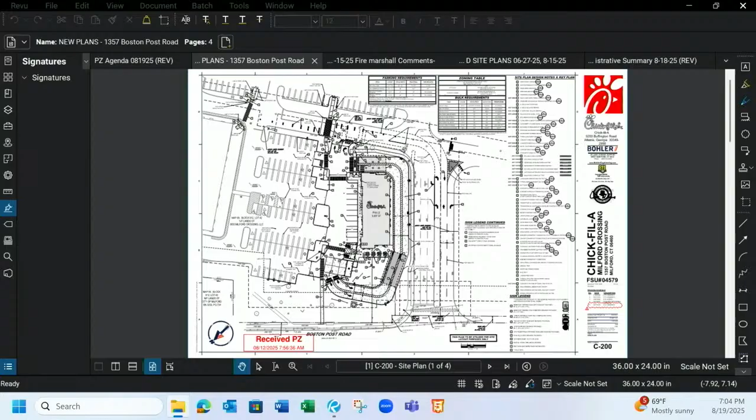So without going into anything further, I want to introduce Chaz Evans, our professional engineer, who will walk you through all the changes, not only with regard to traffic, but also the new landscape plan. And then Ethan, our traffic engineer, is going to drill down even a little bit more on how the new traffic patterns will work. So with that, I'll give you Chaz Evans.

Thank you, John. Good evening, Commission. As John said, for the record, Chaz Evans, professional civil engineer, offices at 65 LaSalle Road in West Hartford. Presenting for you tonight just the comments we heard from the last hearing. Joey Fonseca from our office had presented, and you asked a lot about the clarity and the driver conflicts that you see in the shopping center as it exists today.

Dave, if we could go to slide 4. And David, if you might bring that screen out and angle it towards the board. Thank you. Thanks. Yep. And in the packets that were given to the commission, this is the second flip there. If you flip it up, it should be up on top. This is kind of a rendered site plan just to walk through some of the changes we've made and the overall traffic flow as it exists today and some of the additional highlights.

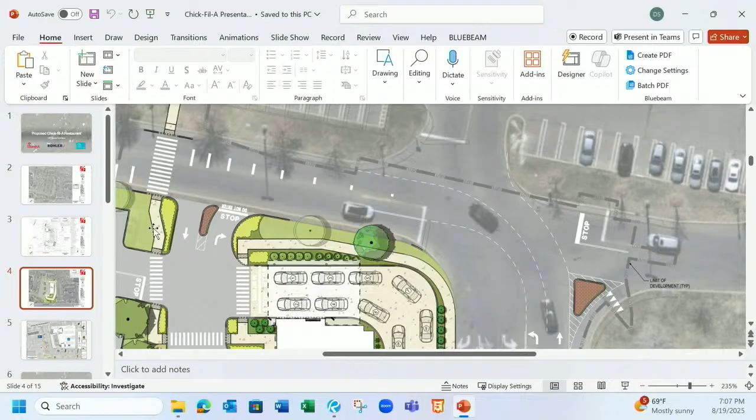Right next to the left in, right in is what's shown as the wide crosswalk. That is the raised pedestrian crosswalk with two flashing beacons on either side for pedestrians. So it acts as a speed hump for the access drive. So you're no longer going to have someone coming off Boston Post Road having that internal access drive and trying to pick up speed. They're going to be moving at a very slow rate, either as they approach Chick-fil-A or as they continue to go through the access drive.

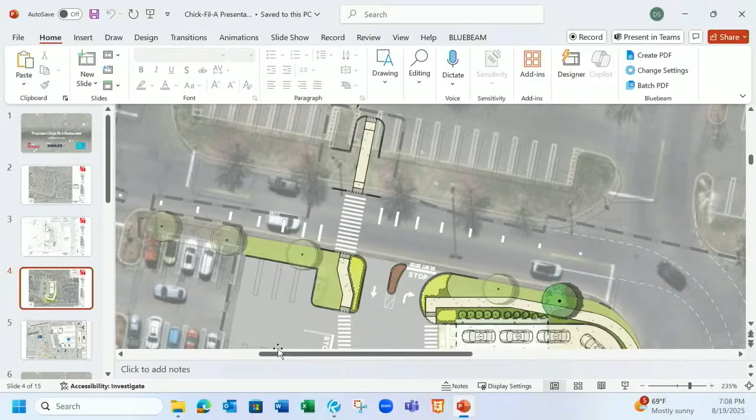So someone looking to turn left isn't having someone that's moving relatively fast. They're coming up on a speed hump. They can make that decision together. The other piece I'd like to point your attention to, to the right of the site in the main three-way intersection, is we've looked to further define all three travel movements that can be made once you come into the center.

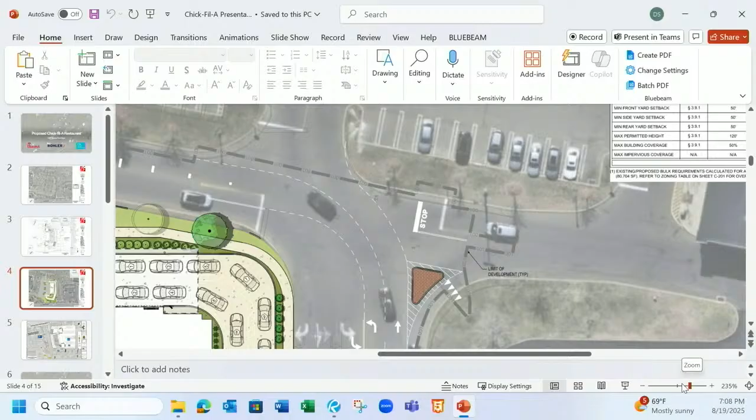Currently, as most of you may know, it's 2 lanes. The striping's dissipated, and for the most part, folks in the right lane turn to the right. Folks in the left lane either go straight or left, but most folks at the stop sign, aside from a turn signal, really aren't sure which movement that person who's coming in off Boston Post may be making.

We've added what you'll see in red there, a mountable curb island. So in the event that someone is in the right turn lane, they're not going to make the movement where it's wide open asphalt and they can just make a left turn and disrupt the flow of traffic. If you're coming off Boston Post Road and you happen to be in that right turn lane, you stay in the right turn lane, you'll have to make the right turn or else you'll come in conflict with the mountable curb.

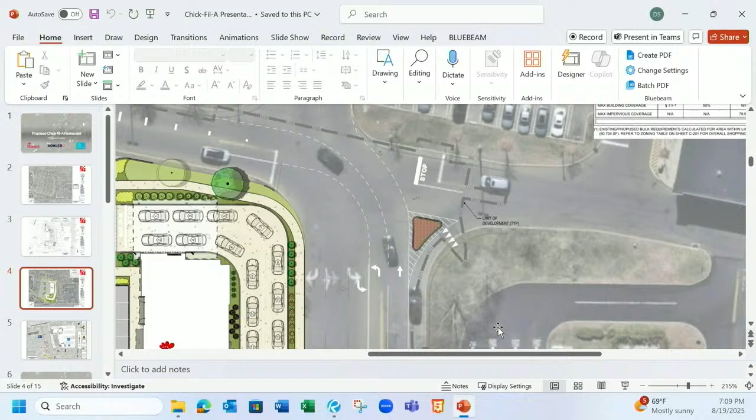Also, we're looking to adjust the double yellow striping to create a dedicated straight lane as well as a dedicated left lane to signalize who would be going straight towards Walmart and then who would be coming left towards the Barnes & Noble and Chick-fil-A development. In addition, as you'd see in a major intersection, we have the dash striping throughout this intersection to really keep people in their lane as they're moving through the intersection.

Again, it's to provide additional clarity to not only the folks entering the site on which lane and which direction to travel, but also anyone at any of the 3 points. If a turn signal is not on, they know someone in that far left lane would be making the full movement through.

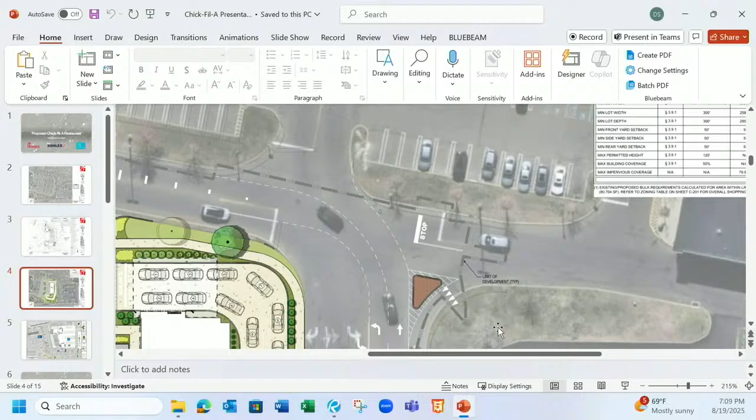In addition to that, there's additional signage we're looking for the plaza to, again, suggest the routes that folks would take to go to Walmart, to go to Barnes & Noble, to go to Golf Galaxy, right when you come off Boston Post Road, just so you can make those decisions as you see all 3 lanes appear.

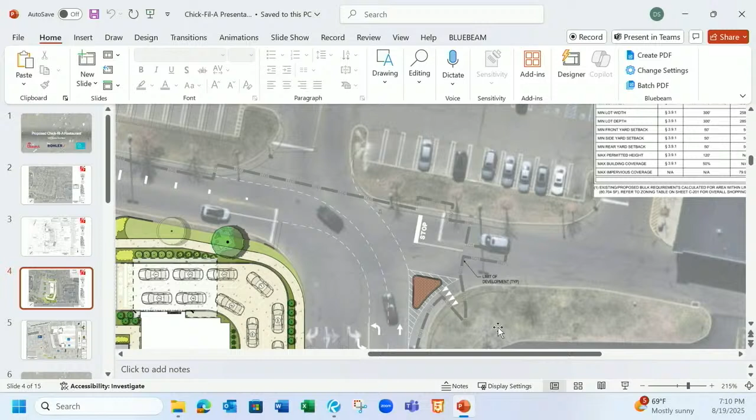The other piece, David, if you could zoom out slightly, that was a comment from staff that's been addressed, and I think addressed in more than just meeting compliance. There was a comment we needed 1 additional shade tree. We had looked at the plantings up against Boston Post Road, and there were a total of 4 additional trees, 1 shade tree and 3 ornamental trees, to give that corner a little bit of additional landscaping.

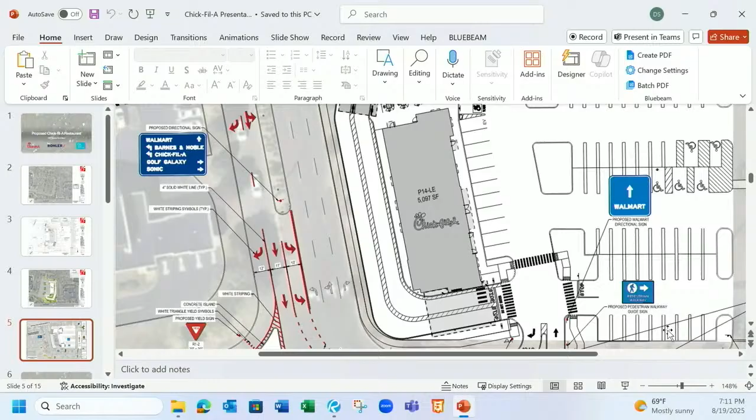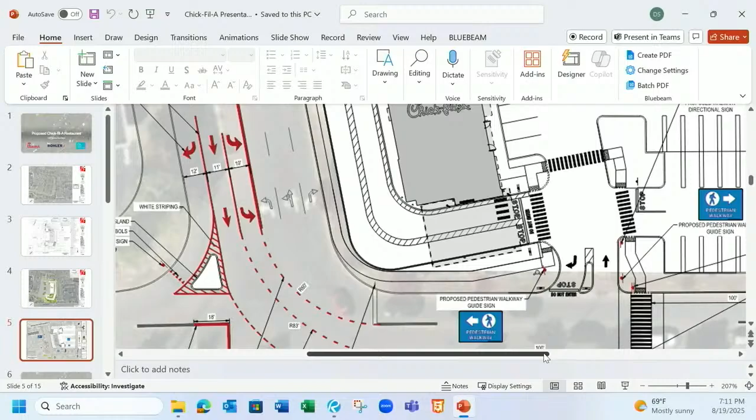And then one additional sign we look to make is as you're exiting the drive-through, there's really two decisions. You're either going to go right or you want to go left. Now that we've removed the left turn movement out, most cars that would make that left would then continue to go straight through this intersection up close to the Barnes & Noble and then take that first right at a four-way stop intersection.

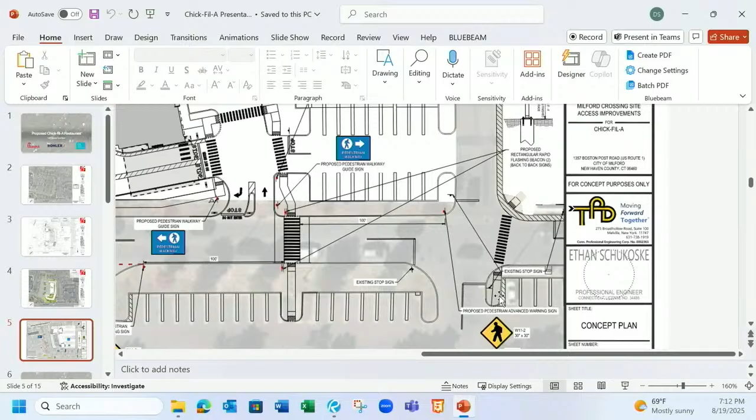So there's no longer the conflict they have up at the central access aisle where there's free-flowing traffic off Boston Post. It's now a four-way stop intersection where folks are using the rest of the plaza. We'd also look to, as a comment that was made last hearing, what's stopping someone from taking a right, taking another right, and then trying to make a left to go to Walmart.

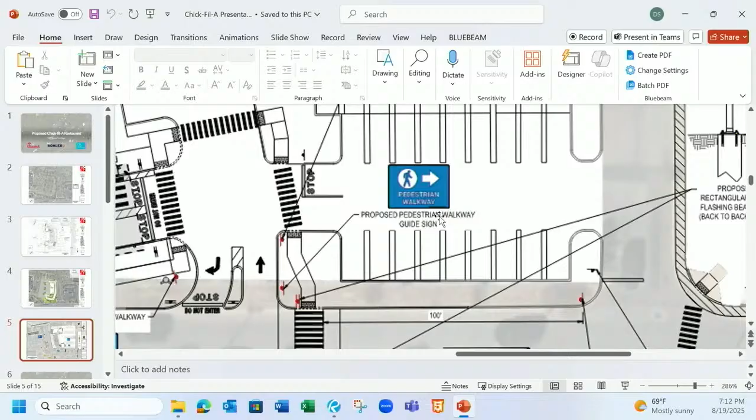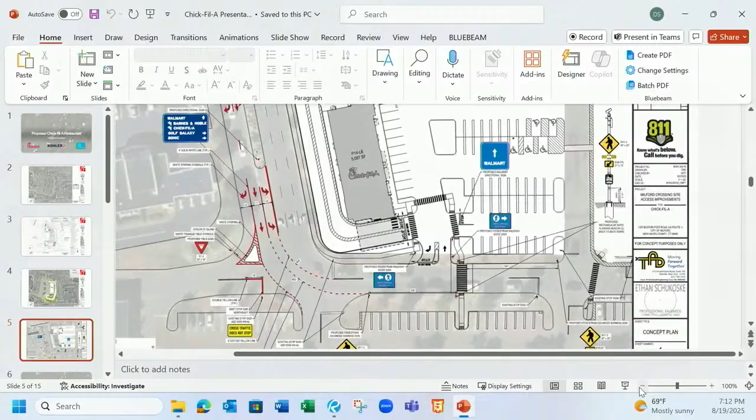We're looking to add the signage that if you're at the drive-through, you exit the drive-through, you want to go to Walmart, the suggested movement is to continue straight, go up to the four-way stop intersection, and then you're lined up directly with Walmart to kind of make a cleaner access and pull traffic away from the main intersection closest to Boston Post Road. With that, I'll pass it off to Ethan to walk you through more of the traffic improvements and how we feel this is providing additional clarity to the center for the proposed development.

Good evening, Ethan Schukoske, for the record, TAD Engineering, offices at 275 Broad Hollow Road, Melville, New York. I presented at the prior hearing, so also a professional engineer in the state of Connecticut. I think Chaz covered the improvements pretty well. He went over most of the changes from the prior site plan. I believe you have in your packets there what's up on the screen. So I just want to touch on a couple of points.

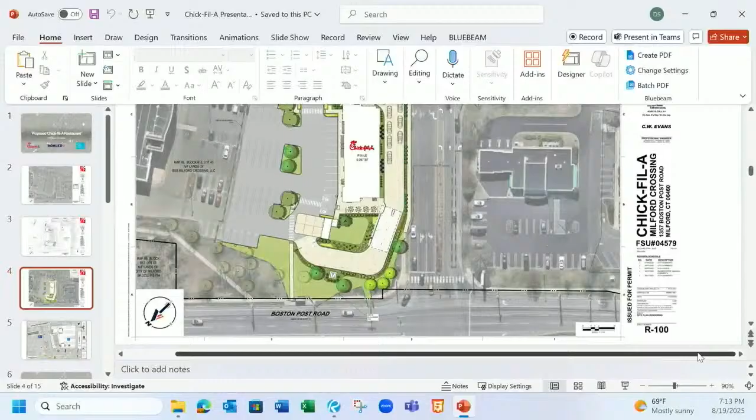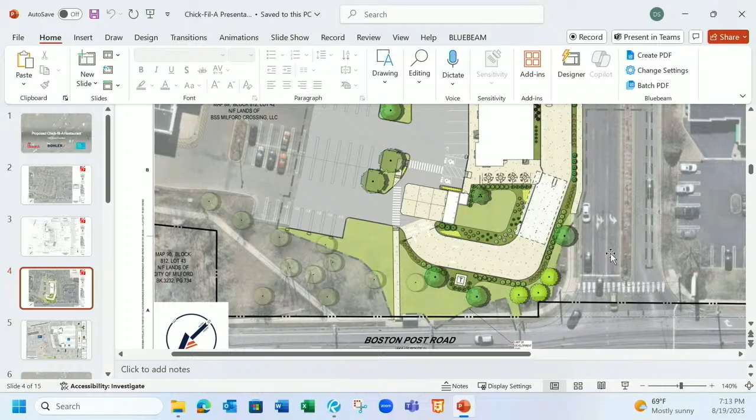One thing I don't think Chaz mentioned was additional sidewalk. I think it was a suggestion by one of the board members here to add that sidewalk from the bus stop that's along Boston Post Road directly to the site. That's in addition to the sidewalk that's being proposed along the drive aisle to the main entrance. So I think those added pedestrian connections definitely help connectivity of the site overall, and especially to the Chick-fil-A, having that direct connection from the bus and the transit options.

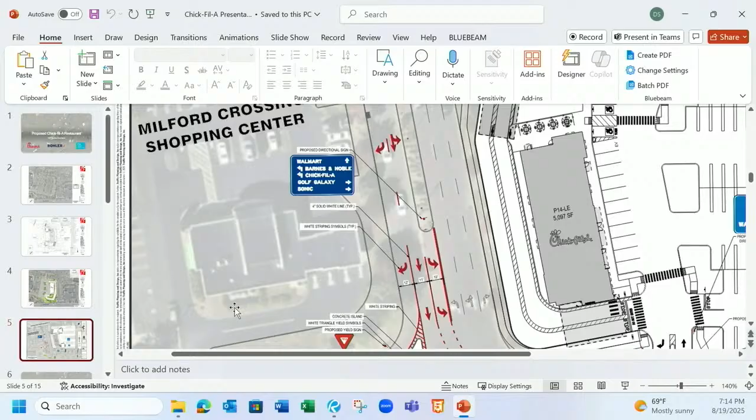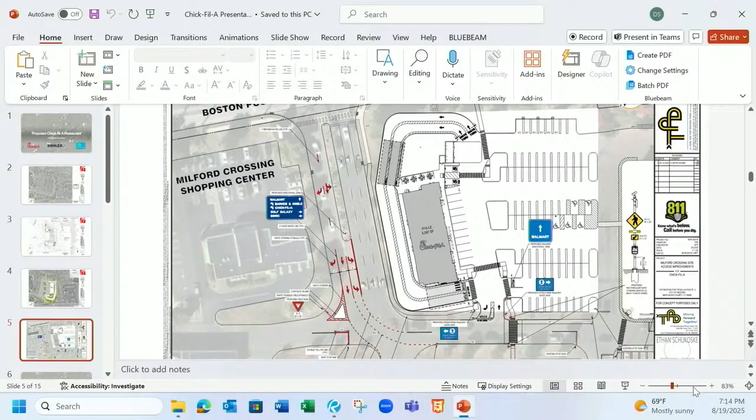If you go to the next exhibit, the signage plan we prepared, Chaz sort of went over this, but that blue sign as you enter into the shopping center, the intention is just to give drivers a little bit more direction. As you're coming, to go left or have the option to go straight to Walmart or right to the Sonic or to the Golf Galaxy. Again, the real intention is to give better direction to drivers as they enter the center than they have today, and especially with the Chick-fil-A.

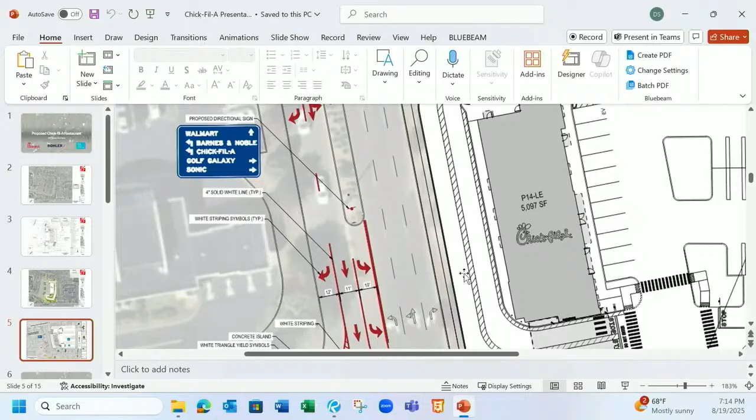As you enter into the center, as we go further in, as it was mentioned, we have that raised island protecting your right turn movements, and in addition to the stop sign, so currently it's a three-way stop, as the plan is laid out here, on the east, west, and northbound approaches to the intersection, and there's no stop as you enter into the center. And that was intentional, so as not to have queuing back onto the Boston Post Road.

We are proposing addition of some signs under the stop signs: Cross traffic does not stop. These are standard MUTCD signs, which just let everyone know, hey, you do have entering traffic from Boston Post Road. Be wary of that as you wait for your turn to go. And then as you turn towards the Chick-fil-A, as you make the left turn into the site, we have some additional pedestrian signage. This was on the prior site plan that was presented at the last hearing, but just to highlight it again,

as you approach the raised crosswalk, you have some pedestrian warning signs, and then at the raised crossing itself, just on the other side of the proposed entrance, you have flashing beacons and pedestrian warning signs. So the idea is to provide that direct connection again from that bus stop all the way down into the center, which is really an improvement to the connections that they currently have, which is, I believe, none.

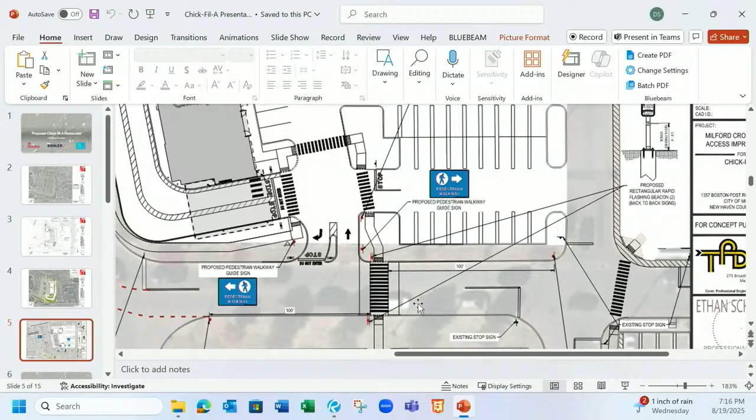So I think Chaz mentioned it, but again, just as you're exiting the drive-through, there's some signage just to let drivers know if they want to go to Walmart, they should be going straight through that first intersection and then making a right out in front of the Barnes & Noble. Happy to answer any questions. I think that pretty much summarizes the changes from the prior application.

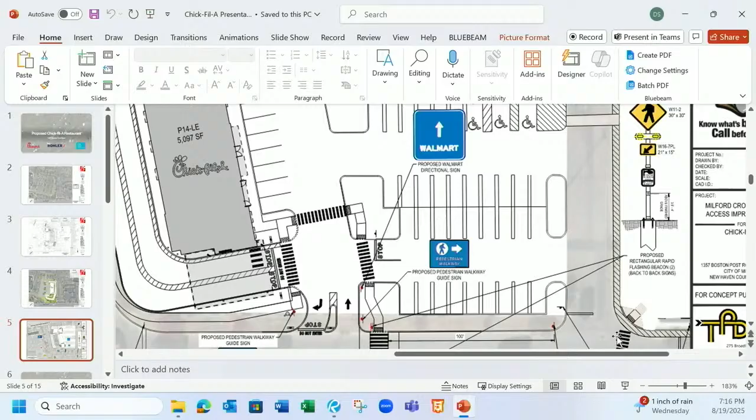Yes, so just to be clear, if you want to go to Walmart, you're turning that section of parking into primarily like a road. So people will be entering and exiting, parking their cars to go to Walmart and walking to Walmart, but it's actually going to be more like a thoroughfare for those who want to go to Walmart. Yeah, it would be a drive aisle like any other in the shopping center. It's just letting drivers know that might be the more preferred route to go straight.

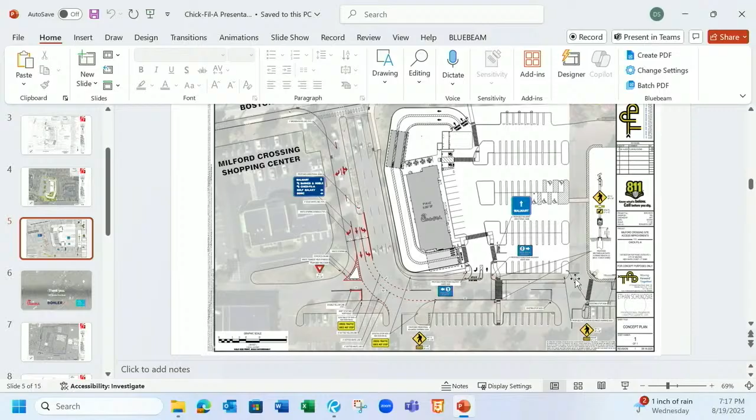Yeah, I'm concerned about the safety of that. It's not normal to have, nowhere else in this complex would have a preferred way to get from one place to another through existing parking. But anyway, that's just a thought and a comment.

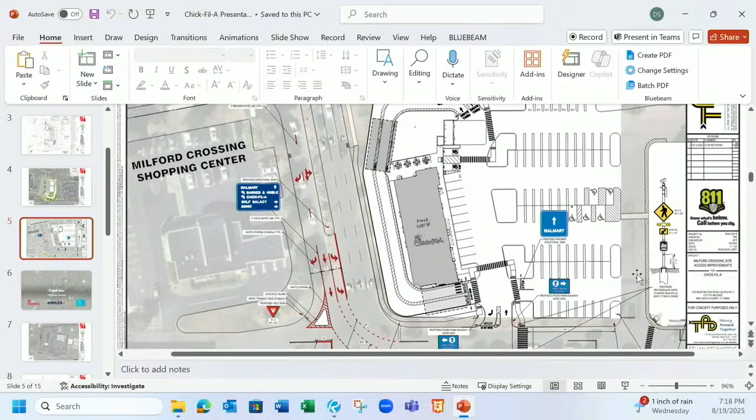Are there any other? Anyone have a question or comment? Are we asking questions, Mr. Chair? Yeah, I think you should, yes. Okay, thank you. Good afternoon, or good evening. Good evening.

Let's say I want to talk about use now. So a vehicle enters the plaza traveling north on the Boston Post Road, and they make a right to enter the plaza, right? Yes. When that individual motorist enters the plaza, there are 2 lanes in the direction they're traveling, correct? Correct. Right. And then at some point, it splits off into 3 lanes. Correct. As you get closer to the intersection, currently there's a median that runs 3/4 of the way down, and then it opens up a little bit.

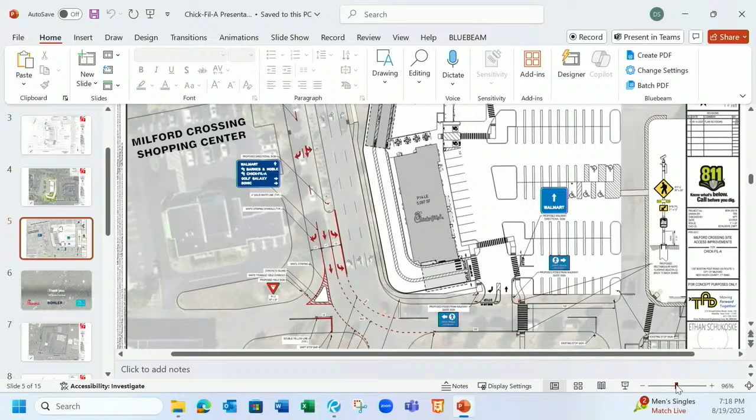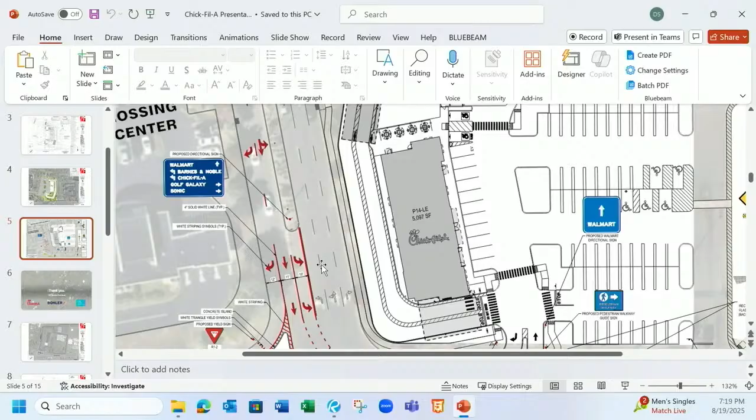That median, it looks like a strip, maybe a couple feet wide by several feet long. You're referencing the existing median as you enter? Right there, yeah. Yeah, it's probably about 12 feet wide, a landscaped median. Okay, so it's going to be a landscape median, not just flat ground. No, yeah, so that's existing, and it's an existing curbed and landscaped median. And it's going to stay that way? Correct. Okay. Yeah, we're using the existing pavement here. As currently today, once you get past that landscape median, it really opens up this wide pavement area, which doesn't have a lot of direction. Right, now it's more of a free-for-all, the way it is.

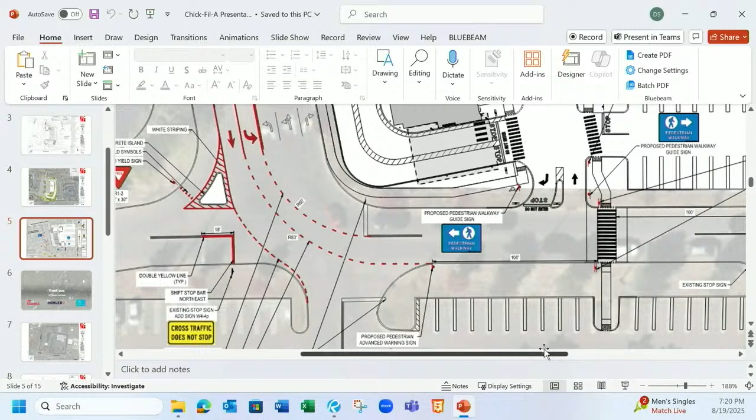Correct. Okay. So it opens up to 3 lanes, and then there's a right turn lane to go to TD Bank, right? Correct. Then there's a straight arrow that leads you to the parking lot of the Walmart. Yes, they will go straight down to Walmart. My question is, it's a straight arrow. Could individuals still turn left using that middle of the 3 lanes? So if you look at the dash striping that we're proposing, sort of directional striping, once you're in that lane, it's intended to direct you straight south as you go down. So if you're in that through lane, and we added this since the last hearing, we added additional striping on your right side to sort of direct you down into that lane.

So, as I understand it, then that straight arrow with the striping, the red striping, is leading motorists to go towards the Chick-fil-A and the Barnes & Noble. See, the red striping, it's leading people towards the right. Correct. It's leading people towards that parking lot. That's for the left lane, and then you have additional striping on your right side that ties into the drive aisle to the south. Say that again. We added some additional directional striping, the dotted striping on your right side, to direct vehicles down to that drive aisle.

Perhaps another arrow in that area would be a good idea to reinforce the point, okay? Yeah, we can certainly look into that, yeah. We're happy to add that. Because you're assuming people drive like engineers. And as a planning and zoning board member, I don't make such an assumption. Understood. We can certainly add an additional arrow. So perhaps an additional arrow would be a good idea. You agree? Yeah. Thank you.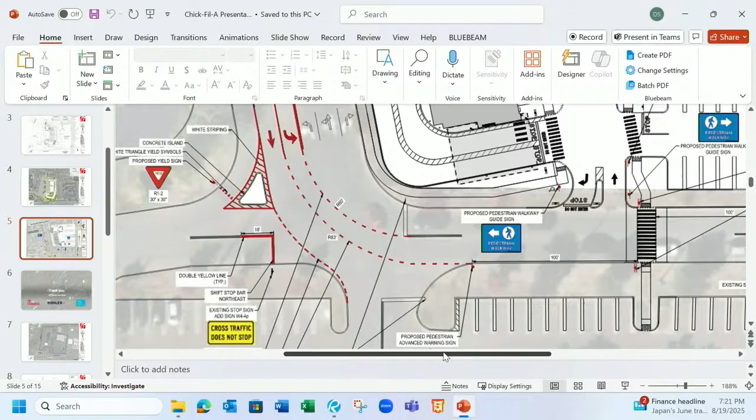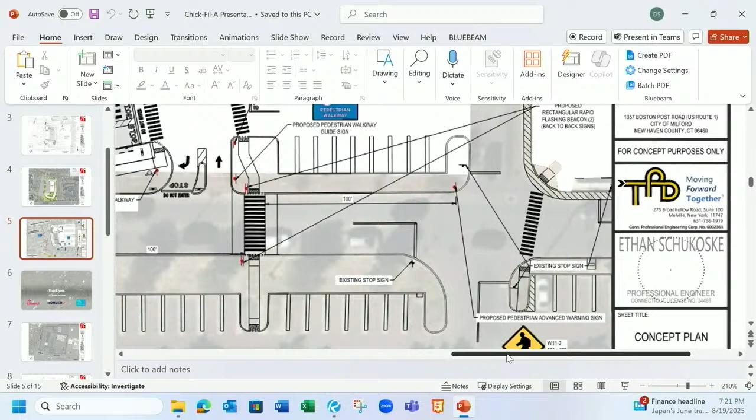All right, can we go now towards the other area of the parking lot? Towards where Lumber Liquidators used to be? Mr. Sulkis? Yeah, okay. You see the crosswalk? Mr. Sulkis, can you move the cursor to the left, more left? See that raised crosswalk? The crosswalk, yeah. That's a raised crosswalk. Correct. Who are the intended users of that raised crosswalk? Any patrons walking from Boston Post Road, or employees of the Chick-fil-A that are parked on the south side could also cross there. Okay, so you intend for employees of Chick-fil-A to park in the parking lot of Walmart?

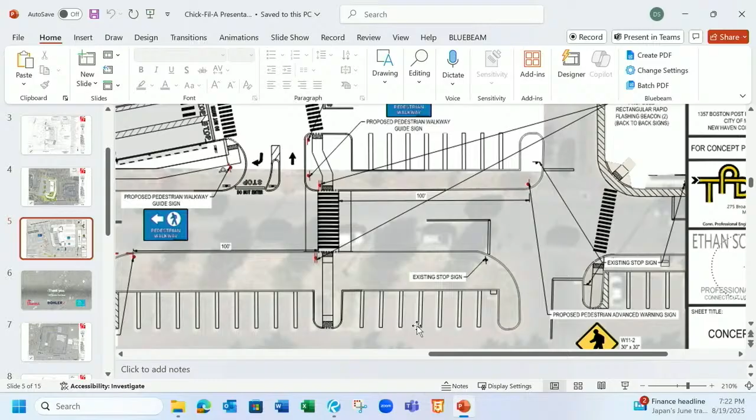They would park on the northern side there. That was a yes or no question? Yes. So just to be clear, I know we touched upon this last time. There are no defined areas. There is no subdivision on this parcel. So anyone can park anywhere and go to any store. It's not as if Walmart can say, that's my parking space, patrons to Barnes & Noble can't use that.

So I know we all tend to refer to it as the Walmart area, the Barnes & Noble area. There is no distinguishing characteristic between all the uses and what they control or cannot control. And this is typical of any large shopping center, power centers, where there is a benefit to be derived by all the retailers, hoping that patrons will visit more than one store at a time. So yes, we can call that the Walmart parcel, but it's not really a defined subdivided parcel that they control.

Just to clarify that, so if somebody wanted to put in a pad site in what we're calling the Walmart parking, that's permitted as well? Well, no. In the same way that Barnes & Noble, we submitted the letter that said they had no objection to this, so there would be the same sort of control over Walmart, but it's not something that they own or they can exclude people in terms of the utilization of parking. So yes, if you want to put in a new bank in the middle of that parking area in front of Walmart, then Walmart would have to give their consent in the same way that Barnes & Noble gave their consent.

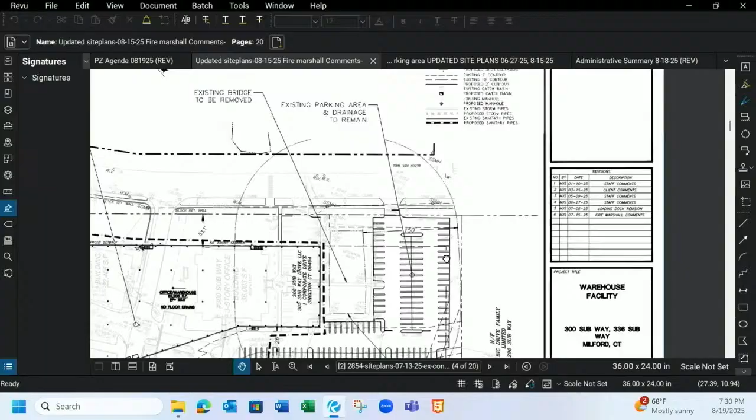There's no change across the street at the 305 address. The only reason that is tied here is because we're changing 300-336 Sub Way, the use and the buildings. So we needed to bring an application to amend that special permit as well, just to make sure that the parking's still aligned. There's a color highlighted parking plan in the application materials that lays out which parking spaces are for which on this particular site.

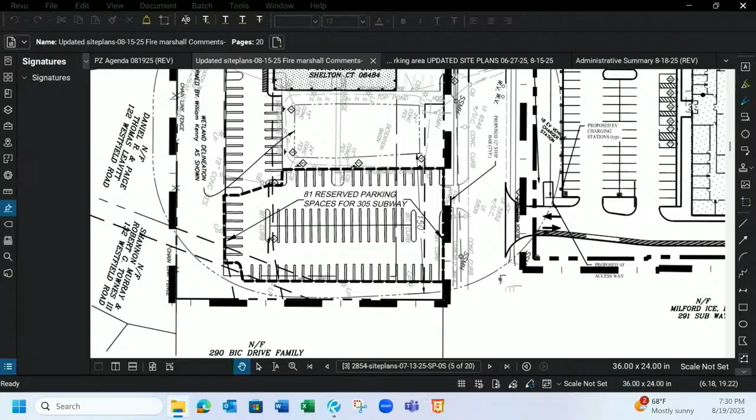Mr. Cinto is here this evening. As I mentioned earlier, he'll talk about the proposed tenant. We've been to inland wetlands and received inland wetlands approval. We've received a favorable review with some conditions from the city engineer, a favorable review from the fire marshal with some conditions of approval, the police commission report with an approval, and sewer commission approval. We started this project late 2024. We've made some revisions over the time frame, based on Mr. Sulkis's comments and Greg Podleski's comments and in the wetlands.

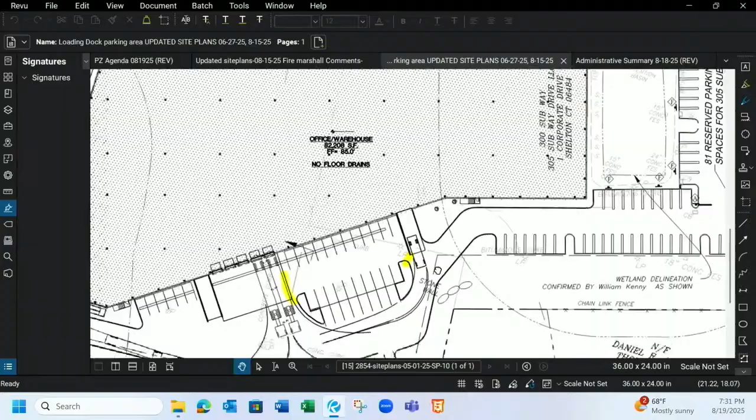One of the revisions we've done recently is we changed the access drive in the back of the proposed building so that the existing trees, some of which are pretty mature and tall, and that existing vegetation would not have to be removed. One of the original proposals was going to require clearing that vegetation and those trees. There's a residential district with single-family houses behind the property, so we thought that would be a great idea. That was actually Manny Silva and Pat Rose's and probably Mr. Cinto's suggestion. So we have all the necessary approvals.

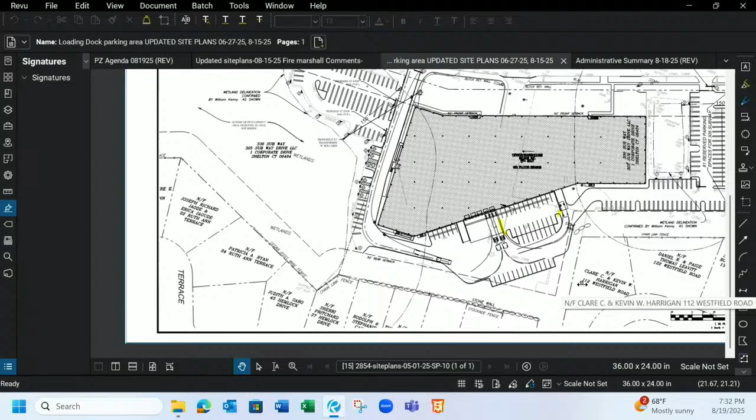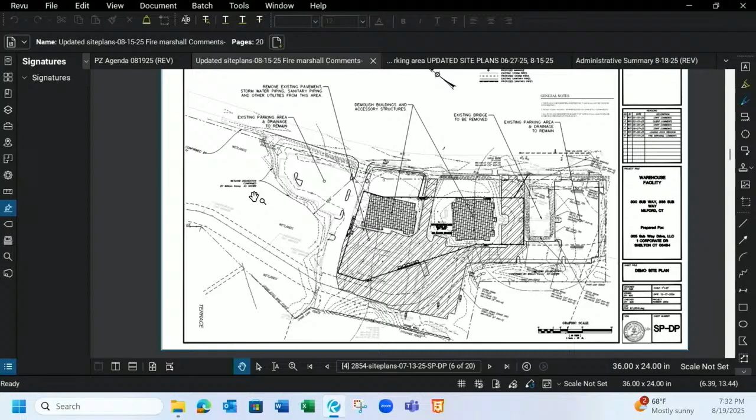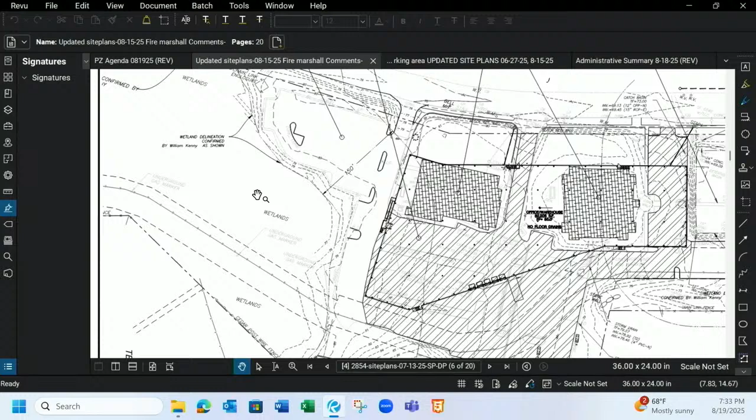A large part of the parcel will remain inland wetlands. We're not changing the site with respect to that area. That area goes back to what's now the Regional Water Company land, I think to the early 80s or even prior. There's a conservation restriction on that parcel. Typically you hear from the city engineer that he would like concrete curbs and sidewalks around the edges of that parcel. In my conversations with him and with Mary Rose, the inland wetlands officer, based on the conservation easement, that section would remain untouched so we wouldn't be in violation of that conservation easement.

I did see Mr. Sulkis's administrative summary form. An earlier version said the project was zoning compliant, and then a revision asks, based on the recent site plan revisions changing the drive aisle and driveway so the vegetation and trees aren't removed, that the plans be changed across the board so that all the plans match. Pending your questions, I'll be followed by Mr. Silva or Pat Rose, the architect.

Are there any questions or comments from the board at this point? Tom? Yes, Attorney Castine, good evening. Good evening. Just so I understand, am I correct in saying that this proposed plan will have no adverse impact on Mondo Pond? That is correct. Thank you. You're welcome.

Yep, go ahead, continue. Thank you.

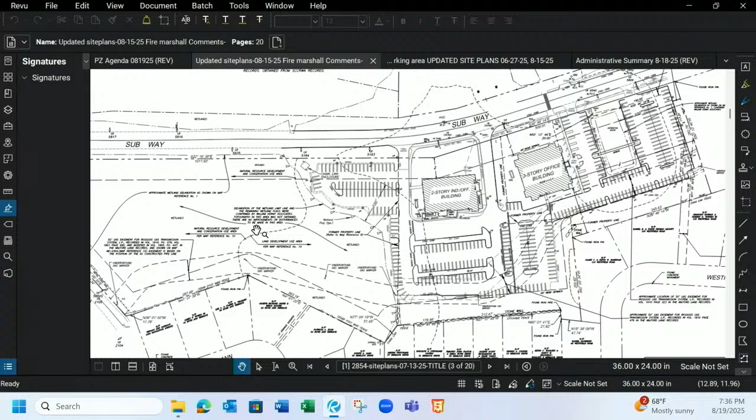And we've had the wetlands review and had the approval; we're not going near our wetlands that exist, and that's not being touched at all, so that's not an issue at all. So if we could go to SP1A, David's probably better. I will show you the revised SP1A. Oh, he's got the correct one, very good.

So this SP1A shows the parking lot on the right-hand side of the screen, which is for the parcel across the street. Then there are parking spaces that go behind the building, then two by the warehouse area where there are loading docks. You've got 5 loading docks and 2 drive-in doors. And then parking spaces beyond the loading area for those trucks that will be coming into the loading docks. And then beyond that is, for the most part, the existing parking that's remaining.

We're adding a few spaces along the drive aisle behind the building, but for the most part, it's existing remaining parking spaces. The building configuration is made up of the constraints of the site. We have a setback from the street of 50 feet. We are within 10, 15 feet of the retention basin on the south side of the street.

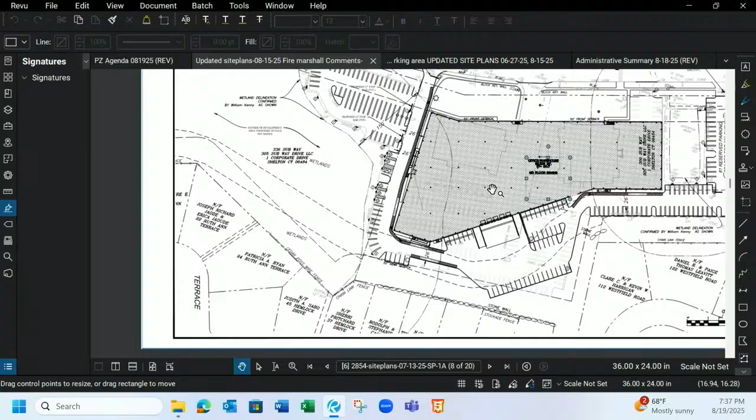And then we have the gas line, which is on the west side, which we have an easement which constrains us. We can't go into that easement. And then the driveway on the north side of the property. So that's what creates the shape of the building, essentially. The building being 82,208 square feet in size.

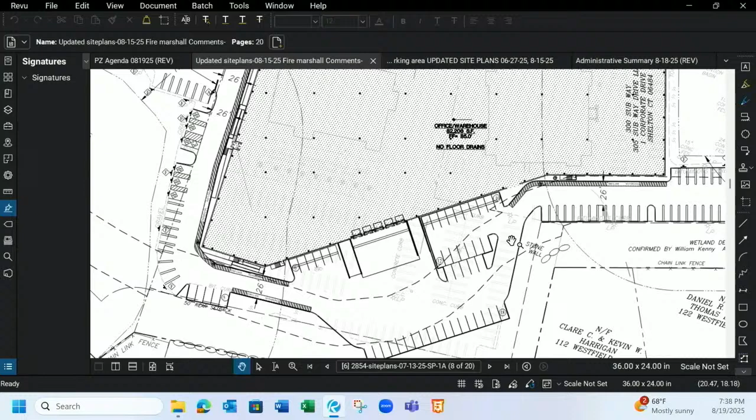Based on the fire marshal's review and some other thoughts about maintaining vegetation on the property line in the rear, we've reconfigured the site plan so that we have consolidated the 5 loading docks together with drive-in doors on either side, and have a parking lot off the right-hand side, which is accessed from the drive aisle. So that allowed us to move our development about 20 feet away from the existing property line on the side there. Dave, if we could just go to A101 if you can.

The building, which is 82,000 square feet, all but 12,000 square feet will be by one tenant. They have about 22,000 square feet of office space in the front on the north and east sides of the building, where you see that office area, and then the warehouse is to the south of that office space. And then there's an available 12,000 square feet below that.

So what we've done is we've split the docks and the drive-in doors so that the 12,000 square foot tenant has a loading dock and a drive-in door, and the larger tenant has the 4 docks and the drive-in door. If we could go to the next slide. These are the elevations of the building.

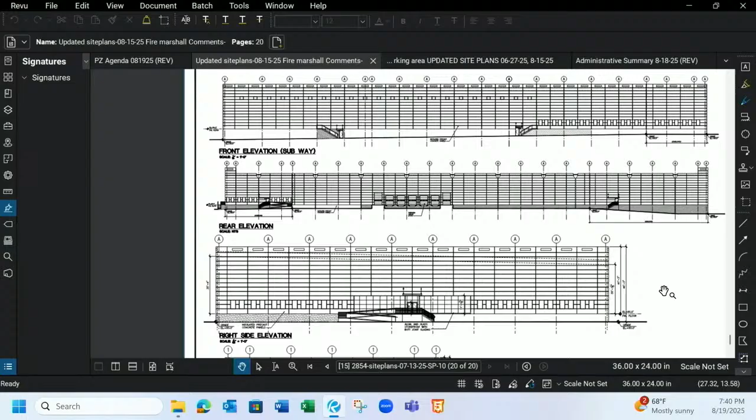What we'll be using is a precast concrete panel, similar to a panel that we've used previously on other buildings. It is white, completely white, and has openings at the top of the panel, so you actually see through it at the top. On the north side, which you see here, this is the entrance into the main tenant, where we have a handicap ramp and stairs. We have a large storefront area, and then windows on either side for the office space.

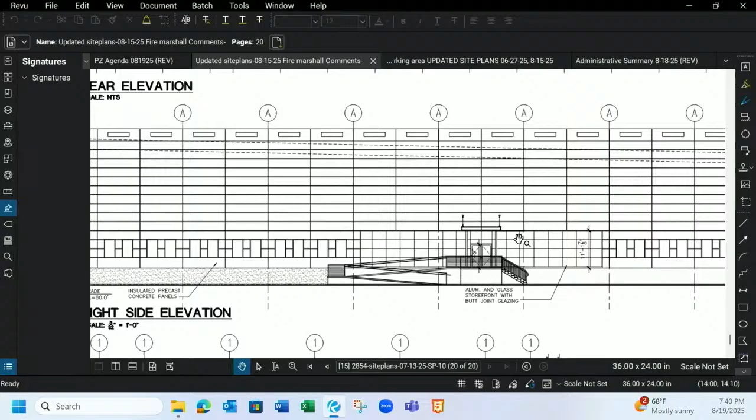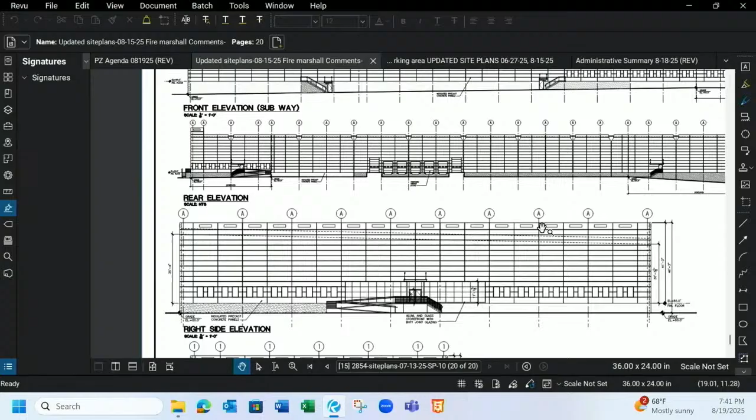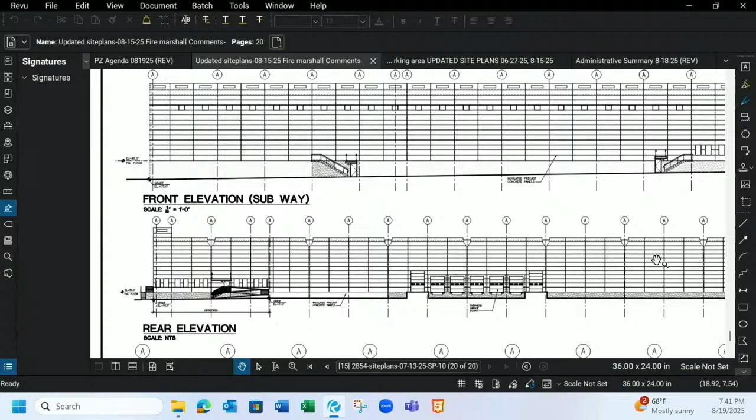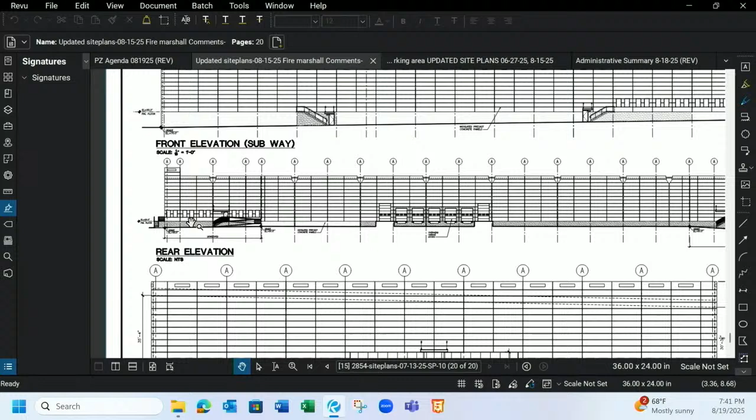Any questions? I'd like to have Manny Silva come up and just talk about the engineering. That's fine.

I guess it doesn't disconnect. I usually like to be mobile.

That's fine. Good evening, Manny Silva from Rose Tiso and Company, registered civil engineer in the state of Connecticut. Address is 35 Brentwood Avenue, Fairfield. I'd like to start with SP2.

So as Pat stated, the site in general is generally impervious area, has 2 office buildings with some paved areas here. As you can notice, the existing pavement is kind of ghosted away, but what we tried to do was keep the new footprint of the impervious area, the parking and the building, within the existing footprint. We had some adjustments. For instance, here, there were some paved areas that we were eliminating, creating a larger buffer for the neighboring properties.

Also here, where Pat was talking about, you can see in comparison on the landscaping plan from our original proposal, we have pulled that further away to keep that within the existing edge of pavement that's out there today. The drainage design is basically broken up into 3 different areas. There's this northern parking area which is remaining unchanged near the wetlands, and that has kind of a sheet flow that goes to edge gravel trenches, which then infiltrates the water underneath the actual pavement.

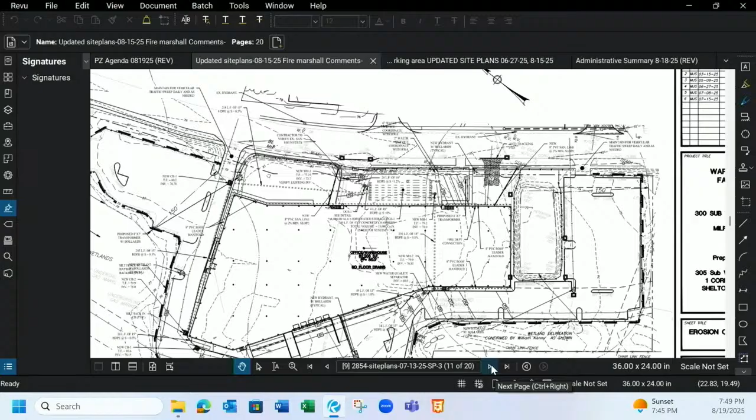And then here is Bill Kenny's landscaping plan. As you can see here, we have some landscaping where there were some paved areas in that lower corner near the loading docks. And this is where you see the difference that Mr. Sulkus was pointing out, is that the landscaping plan hasn't been updated to the other plans. We actually pulled this right here further away from the neighboring properties, and it's essentially here now, kind of where the existing pavement edge is today.

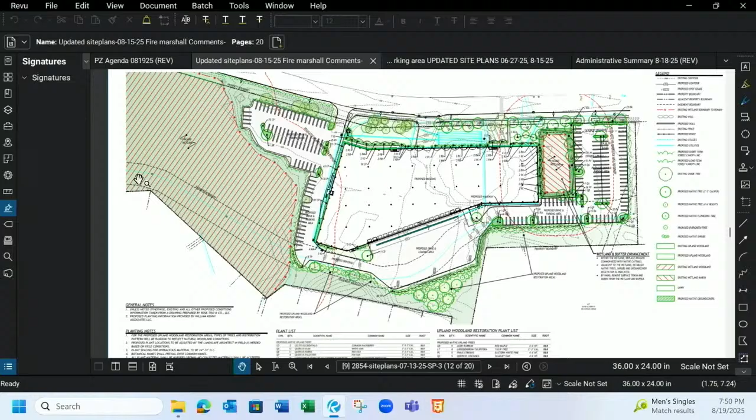So this area here will preserve the existing trees, and there'll be an existing native buffer here, and then we're going to supplement that by removing this pavement here and adding trees along this triangle here and along this border here with our neighbors.

SP5 is our lighting plan, and a lighting plan is to ensure that we don't have any light spillage off of our property. So as you can see, this is our point-to-point. Our fixtures are full cutoff, night sky compliant LED blades, similar to what's across the street. And as you can see in our point-to-point calculations, there are 0-foot candles being trespassed onto neighboring properties.

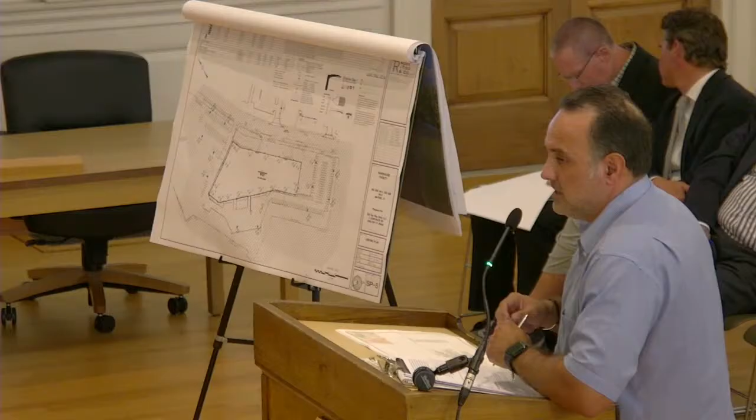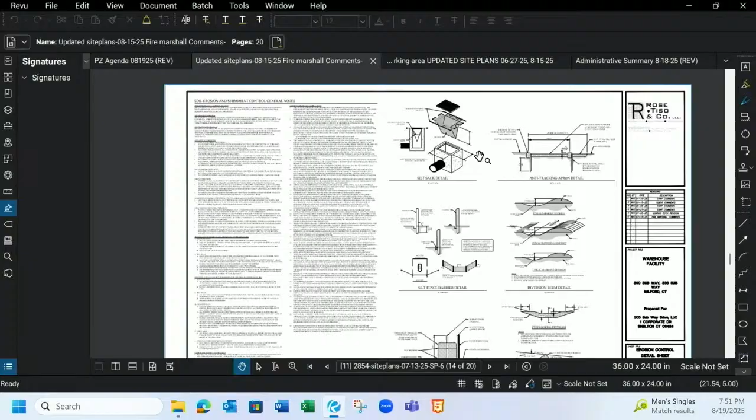SP6 is just our general phasing and notes for our soil erosion control during construction. Here is that silt sack detail where we have that piece of geofabric inside the actual basin to ensure that the units stay clean. And then we have, if we have any need for a diversion berm to a temporary sedimentation structure, if we anticipate a large storm event coming or anything of that nature.

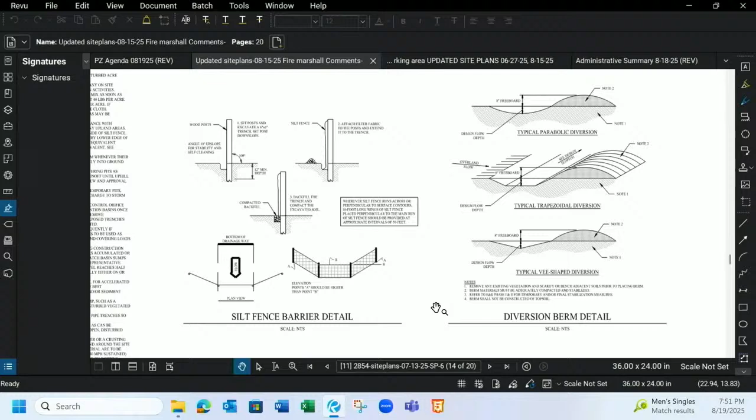SP7 is your striping detail. Even though we show single lines on our site plan, it's intended to always do the double as required by the town of Milford or city of Milford. And then just our striping details, things of that nature, signage.

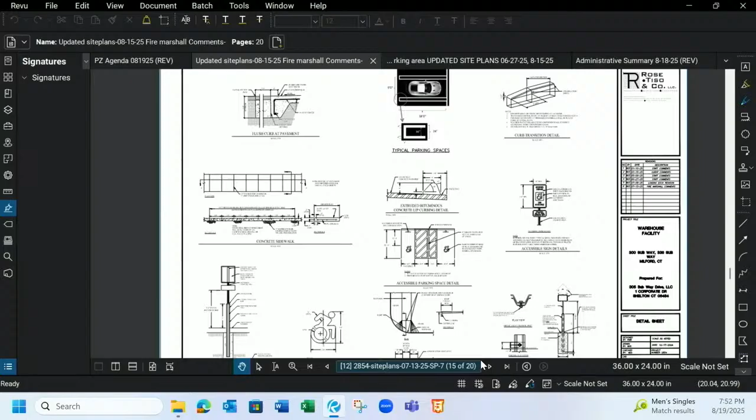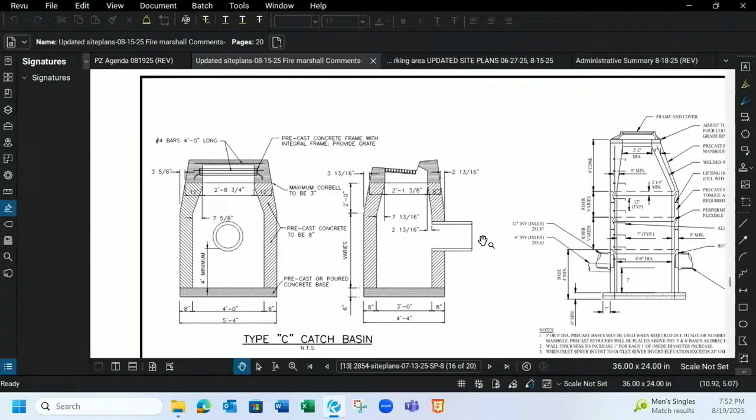8 is our gallery detail. Here's those snouts that go in every catch basin on the outlet to stop floatables from leaving that catch basin. And then we have our 4-bay, which we're going to put in the existing retention pond to increase its function for water quality. Again, just some more utility details, and I'll just keep going.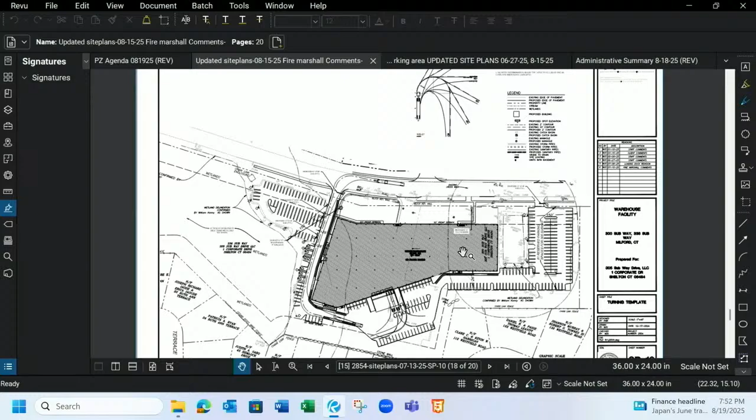And then lastly is our turning template diagram. This was done to ensure that the 87-foot tractor trailer, which is the largest tractor trailer that you can have on U.S. roads, it's called an interstate tractor trailer, can circulate the site, come in the site, leave it, and then come into our loading dock area here, and then exit. And I think that's it for me. If there's any questions, I'll be happy to answer them.

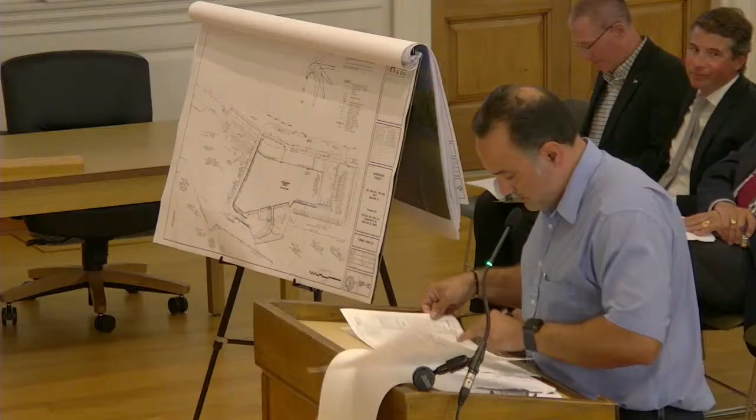Any questions or comments at this time? John? Thanks for coming in tonight, Mr. Silva. You mentioned the EVs. How many stations do you have for electric vehicles? I think it's, if you go to SP1, we have 6 charging stations, which we show as 3 diamonds, which are doubles, right? There's 2 charging stations per diamond, right there.

Thank you. And along the same lines, a building like this seems to be perfect for solar. Was there any consideration given to putting solar on top? Absolutely. So once the building is complete, we'll have some solar bids to see if the solar, which I'm sure it will be suitable for, and then we'll put it up there. Okay. Very good. And one other question.

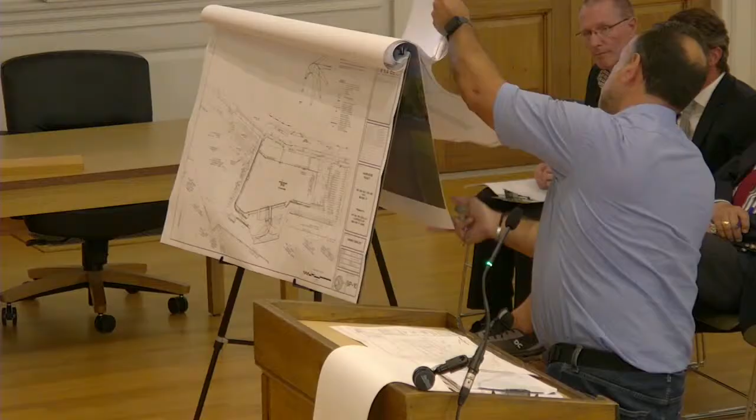I'm not sure, but on page 4, there's a note that a bridge is being removed. I can't really tell from the plans what that's all about. Currently there's a pedestrian bridge that would go from this parking lot over to the existing building that was there. Here, I'll show you. To leave that bridge would be a little bit useless because it's just going to bring you right to a building wall. And it's a bridge over? Over the retention pond right now. Oh, I see. So, yeah, so there's a retention pond here.

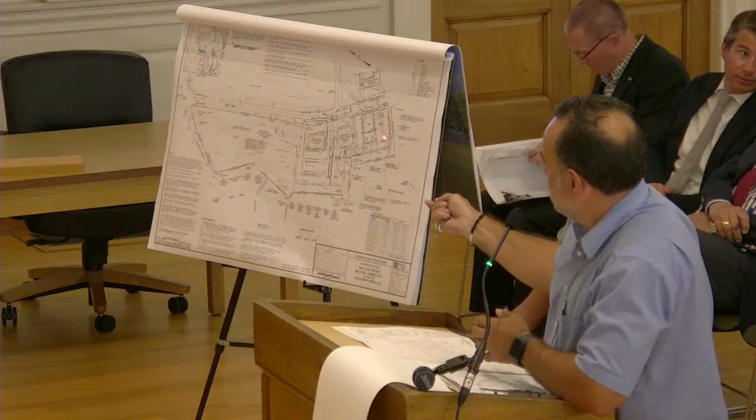Its purpose is to control stormwater, but Subway at the time created a pedestrian bridge to kind of shorten your travel time to this building from this parking lot. Right. So since it's going to nowhere, we were removing it. Right. Yep. Okay, thank you. Any other comments or questions at this time? No, you guys continue on. All right, thank you very much.

Mr. Chairman, my name is Bob Cinto. My offices are located at 1 Corporate Drive, Shelton, Connecticut. We have a tenant for this building that's going to be roughly 22,000 square feet of corporate offices. The tenant is in the business of maintaining air conditioning and heating equipment for residential use. So the warehouse use on this would be for compressors, parts, pumps, all those things you might need to make repairs. So it is a 40-hour-a-week operation, so there's not any business at night or anything like that.

It's not like you have trucks coming in and out. They'll take in the material, and then when they need it for services, they would take it out of inventory. When we designed the building, we didn't put any windows on the back side of the building because we know that's a residential area behind us. We resubmitted a site plan because we were going to have to cut down trees, and we didn't want to cut down any trees with our neighbors. So that's what we had to redo, and Dave worked with us on that. The steel is being designed for solar, so if anyone wants to put solar on the roof, they're going to be able to do that.

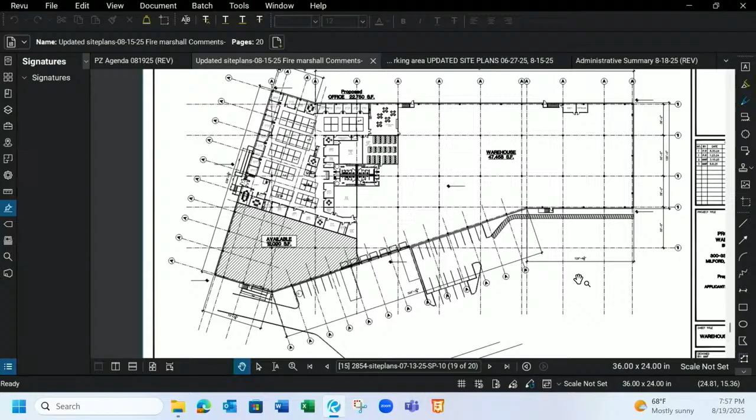This is my 50th year in building buildings for my own account, and I've never sold a building, and I don't screen any phone calls. So we own these buildings, we maintain them. If you see the one we did across the street, I think we did a very good job on the landscaping. The building really has no effect on the pond. Mandy did a very good job, I think, explaining all the improvements we're doing to the water treatment. So we're really adding to the water treatment from this site.

The only thing I would like to ask you, we made this deal before Trump and his tariffs, okay? So, we have a commitment at a certain price, and if it's something you would like to see, if you could pass it tonight, I would appreciate it, because the prices on all my materials are going through the roof. I mean, the building is steel, the deck is steel, the sheet metal is steel, the steel deck, steel pipe, everything is steel here. So the price in this job is really getting up much higher than we anticipated when we did the transaction, okay?

So that's a part of the deal, okay? So whatever you can do, I appreciate it, and I thank you for your time. Thank you. Thank you. That's our presentation for this evening, unless there's any further questions. David, if you want to give us an overview before we open it up to the public, I'd appreciate that.

The applicant is proposing to construct a combination warehouse office building of 82,208 square feet. The development site is currently made up of two parcels, 300 and 336 Subway, which will be consolidated into one parcel to be known as 300 Subway. The total combined size of the consolidated parcel will be approximately 12.6 acres.

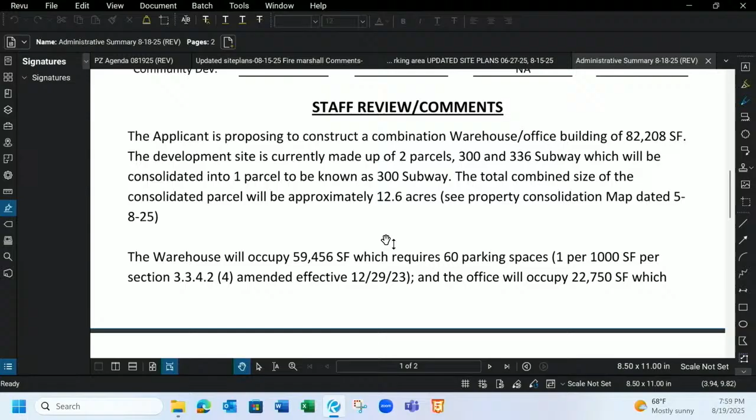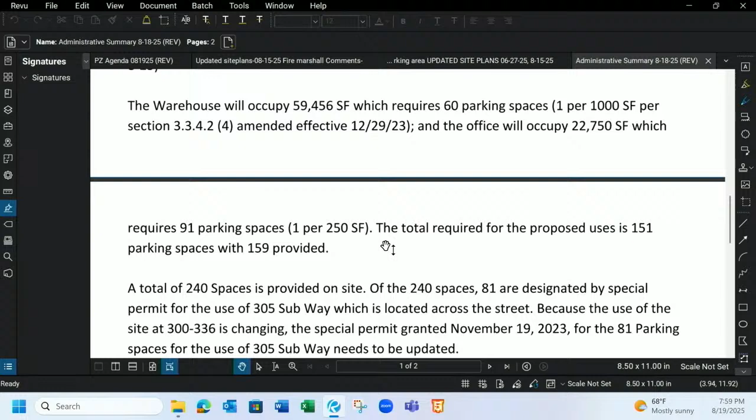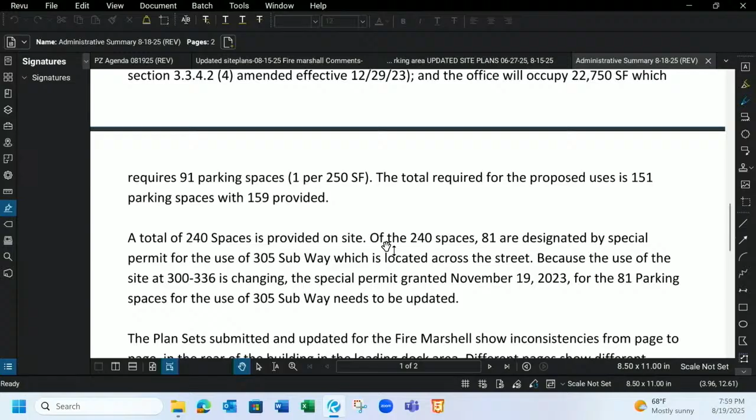The warehouse will occupy 59,456 square feet, which requires 60 parking spaces, 1 per 1,000, per section 3.3.4.2, subsection 4, amended effective 12/29/23. And the office will occupy 22,750 square feet, which requires 91 parking spaces. The total required for the proposed uses is 151 parking spaces with 159 provided. Total of 240 spaces is provided on site.

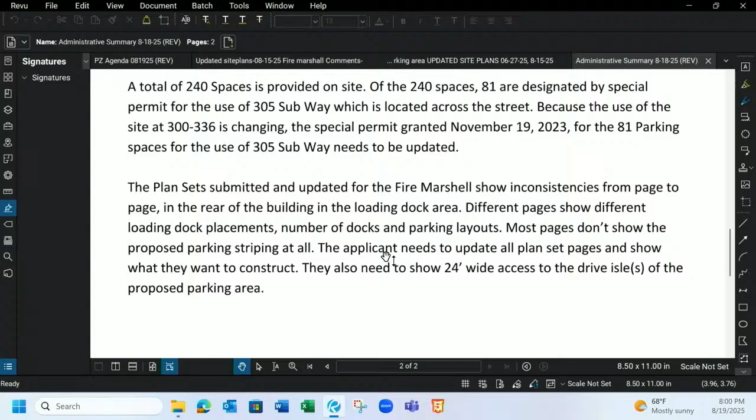Of the 240 spaces, 81 are designated by special permit for use of 305 Sub Way, which is located across the street. Because the use of the site at 300-336 is changing, the special permit granted November 19th, 2023 for 81 parking spaces for the use of 305 Sub Way needs to be updated. The plan sets submitted and updated for the fire marshal show inconsistencies from page to page in the rear of the building in the loading dock area.

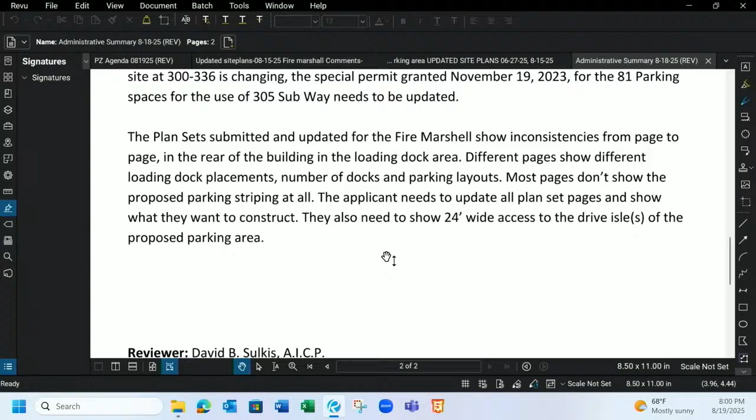Different pages show different loading placements, number of docks, parking layouts. Most pages don't show the proposed parking striping at all. The applicant needs to update all plan set pages and show what they actually want to construct. We actually heard tonight what that is. They also need to show a 24-foot wide access drive aisle of the proposed parking area. That's been redesigned, so it has that. That's it. Great, thank you.

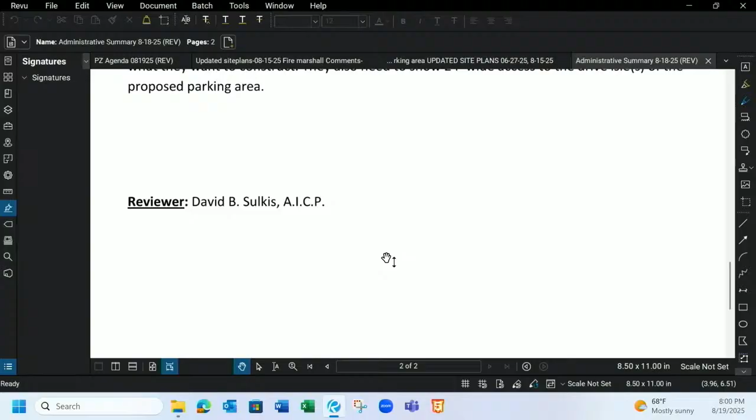Any questions at this point before we open up the public hearing? Seeing none, we'd open up the public hearing if anybody would like to speak to this. Come on up. Going once, going twice. Okay, we're done with that. Would you like to rebut the silence? No, thank you, Mr. Chairman. Appreciate it. Okay. So without objection, we will close the public hearing, and I would hear a motion.

Brian. With regard to 300-336 Sub Way, I move to approve with conditions petition of Kevin Cresceden Esquire for a special permit with site plan lot consolidation for an office warehouse at map 41, block 303, parcel 2, 2U and 8F, of which Bob Cinto is the owner. The condition being that the reports from the city engineer, the fire marshal, and the inland wetlands, and the city planner's administrative summary will apply.

You have a motion, have a second? I'll second. John. Any discussion on the motion? If you would, please call the vote. Oh, I'm sorry. Yeah, I'll state for the record that this was clearly a very well thought out plan, and I look forward to voting for it. Excellent, thank you. Sorry for not seeing you.